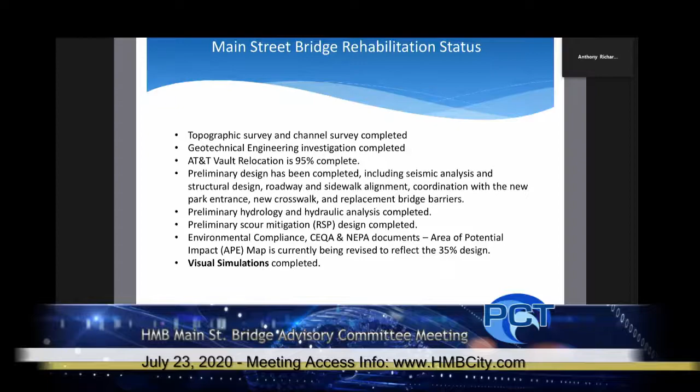We're going to phase the project and try to open up traffic as soon as possible, but for most of that 1.5 years, we would have one lane of traffic. That's pretty disappointing to the downtown businesses.

Compared to the original option of closing the bridge down completely, this is the best scenario. Closing it down completely would have been unthinkable and caused rioting over the one-way streets.

Are you going to provide other ways to get downtown besides the bridge? The traffic flow coming to downtown from Highway 92, heading south, would be open at all times. Going back to Highway 92, you would have to go down Kelly and Highway 1 and then back to 92.

Would we have additional signage for people to know where to come and go? Absolutely. We've already looked at the traffic circulation and are proposing some signage. We reviewed that this morning, and we'll make sure adequate signage is in place well in advance of the bridge closure, with communication through the web as well as flyers to the businesses.

Is this committee allowed to look over that signage before it's signed, sealed, and delivered? Absolutely, that's one of the things we'll bring to you. We could even schedule it for next time, since we've already looked at the signage and are taking the approach of more is better, so people understand exactly where to go. The signage will be available in about a month, and we could share that with you at the next meeting.

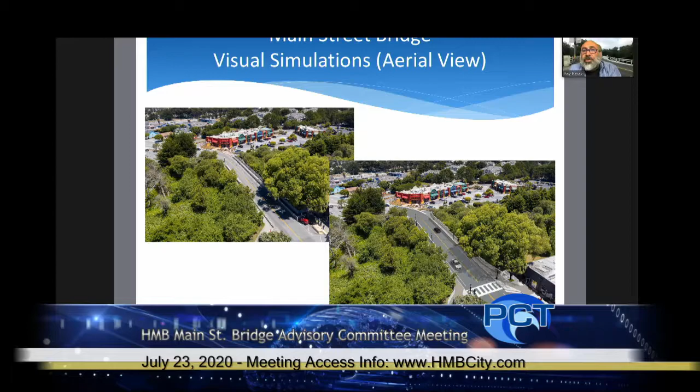So this is the aerial view. You're looking from the south to north towards the shopping center where the coffee company is, on the north side. You'll see a slight view of what the bridge is going to look like, and the south side, where we've added a crossing and conforming sidewalks coming on both directions.

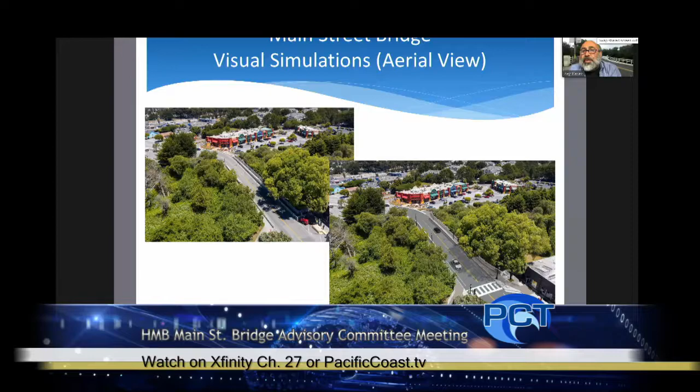Let me move to the next one. This is the existing view on the left and the visual simulation on the right. Let me get my pen here. What you see on the left side is this barrier, which is going to come out and is no longer required. Instead, we have a new barrier with a crash cushion at the end. What you see on the sidewalk is also a MASH-approved FHWA barrier that's steel and painted white.

The barrier between the pedestrians and the vehicles is concrete, also painted white. As you can see, the bollards at the end of the barrier have been removed because FHWA no longer allows any vertical intrusions unless they're set back 16 inches from the barrier, so it was not acceptable to put the bollards at the end.

Instead, we have those crash cushions, as you can see here, with the orange markers to make sure nobody has a head-on collision with the barrier itself. The sidewalks are concrete stamped to look like the existing wood color of the current sidewalk.

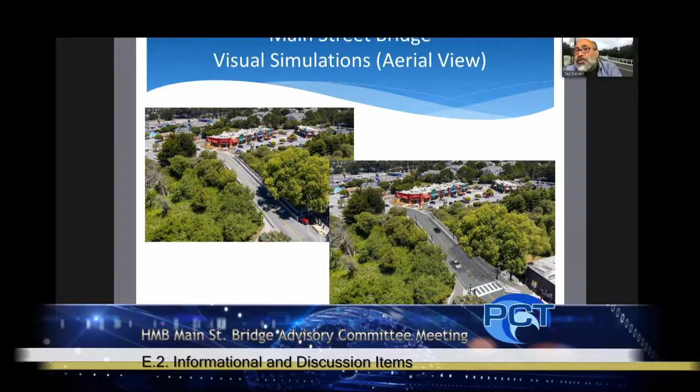Let me go back. Pardon me, Ray. On the crosswalk, John had mentioned a few meetings ago that the old Pasta Moon, whoever owns that property now, there was going to be one parking space taken, and there had to be a move to do that. Has that been done?

The parking space, we will be using that parking space to widen that area and create the crosswalk, correct. Currently we have posted signs that it's no parking except for loading and unloading. But eventually one of the parking spots will come out and be included as part of the sidewalk and crosswalk here. This one is looking to the north and you can see where the crosswalk is.

And Pasta Moon, it's the old Pasta Moon. Now it has a new name, I believe. I just looked at their menu recently and it's another Italian restaurant. I just can't recall the name, but they'll be opening up soon.

About the north end? Yes, we have a pretty significant curve there, and I think currently you might be able to see it in that image. There's those bumps in the middle there to kind of let you feel if you're veering off into the other lane. Are those going to be on that tight curve for the new bridge as well?

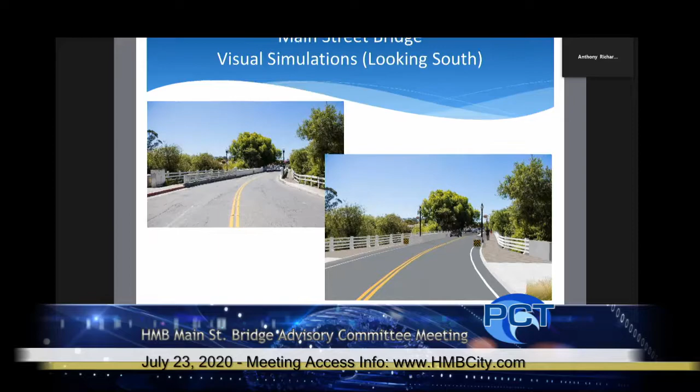Doug Garrison is our planning contact, so Doug, would you be able to respond? Sure, Rick. Well, like most everything, it will require a coastal development permit, so you'll be seeing that along with all the environmental review, just like on most major projects that go through the Planning Commission.

This one's a bit more complicated just because of the number of different agencies and departments within Caltrans involved. It's been a bit of a moving target trying to meet the engineering safety standards, the historical resource standards, and just get the project pinned down enough where we can have a stable project description and get the ball rolling on the other components of permitting.

Okay, great. I don't see anything I would find objectionable from an architectural review perspective. I can't speak for the other 4 members of the Planning Commission, but it'd be great to get something in front of the Planning Commission in the near term, so we don't have to worry about rewriting things after we've gone through a long and extensive engineering process.

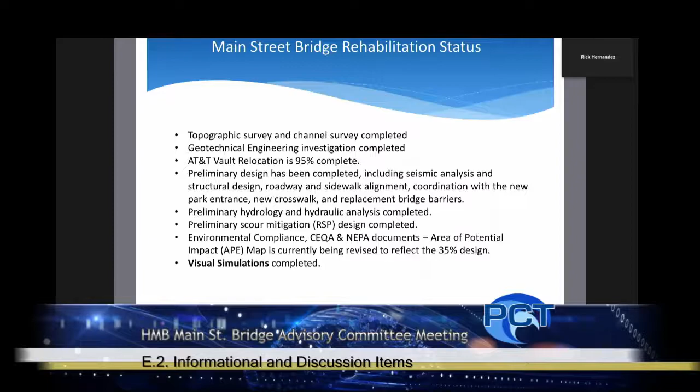The only question I do have is—I understand we have safety standards, we have engineers who've looked at things. Like Jerry and others in this process, we've all seen things that Caltrans and city engineers have put in place from a pedestrian safety perspective that aren't always tip top. So my question is more about pedestrian safety and cars running over the sidewalk. What are we doing to make sure pedestrians are safe after Pumpkin Festival, when some of the rowdies are leaving town having had a little too much to drink? How do we handle those situations to protect our pedestrians?

I'll jump into this in the very basic sense. The new standards we're challenged with, in terms of the historic nature of this, are all designed around protecting pedestrians and ultimately protecting the motorist as well. Ultimately, this is a slow speed bridge and needs to continue to be a 25 mile per hour area, which is what's led us to some of our challenges with design standards that are looking at 45 mile per hour straight-on hits by an SUV.

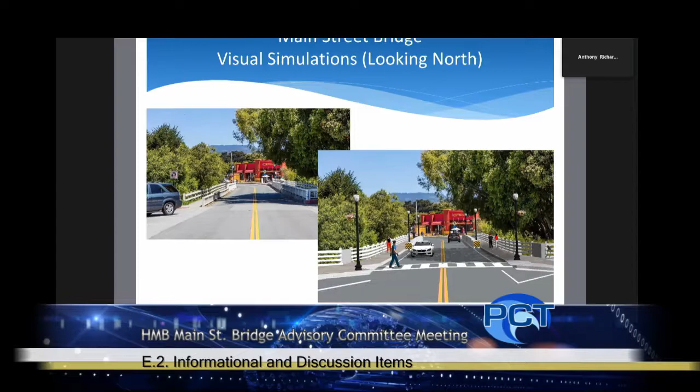One thing that may not be totally apparent is the proposed concrete barriers are in exactly the same location as the existing ones. So as you're driving over the actual bridge portion, it's a narrow lane, but as soon as you get past the barrier, the roadway actually widens out by about 18 to 20 inches on each side. Right now that steel railing is in line with the concrete barrier, so we've actually pushed the sidewalk out a couple of feet. That's going to help from a pedestrian safety standpoint—pedestrians are pushed back away from the traffic lane. There is still a white line, so that's going to help with traffic calming and keeping traffic offset from that curb line.

I feel a little worried about that crosswalk, specifically for the huge amount of delivery trucks we have coming through that area. So I think it's great—I didn't realize there was a hump there already—but I just want to put that in everyone's brain to think not so much about cars and SUVs and pickup trucks, but the big semis coming with equipment on the back end of them as well.

Yeah, I agree with you, Jennifer. I think for the next meeting, besides bringing you a detour plan, we'll bring you a focus plan on this crosswalk and how we plan to improve it to make it safer. Anthony and I will go back to the drawing board and come up with a new plan, and we'll bring it to you next time.

Yeah, share with us the safety aspect, the calming of the traffic, everything Jennifer said. I would put that into the next agenda, because there's a risk there between bicycle, pedestrian, and heavy traffic—this is the only place where everything converges. So it'd be good to see you next time, Ray.

So what we'll do is add the sharrows, we'll work on this crosswalk, go to our toolbox for traffic safety on pedestrian crossings, and see whatever we can do to make this safer. We will add that in and bring you a larger version of this focused area, both as a simulation and as a plan to look at.

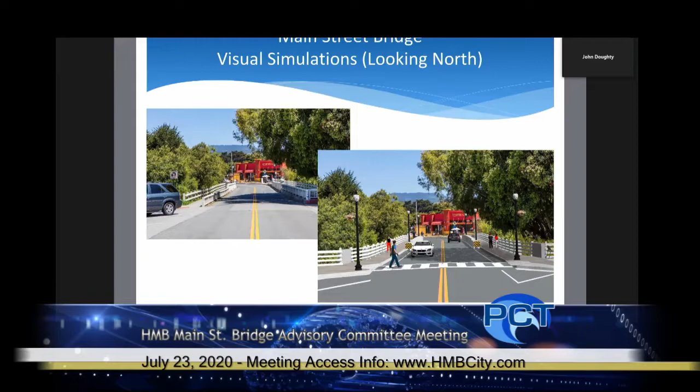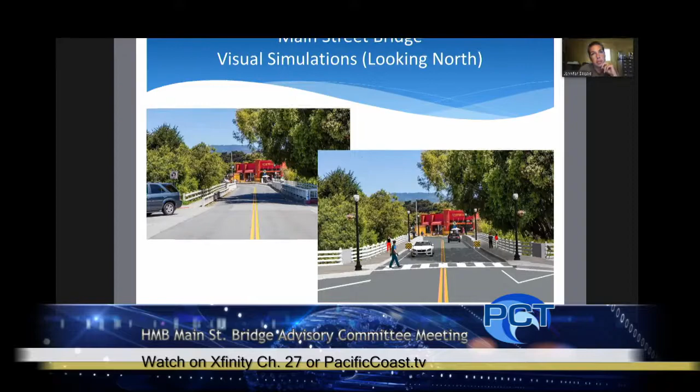But I guess, being the pessimist on this, I think what we see is a lot of those trucks going down the middle of the street, so the Botts' dots won't be a factor because they'll just straddle them. But that's just my pessimistic nature coming out. And the sound can be loud if a noisy semi goes over it. So I think these were great comments.

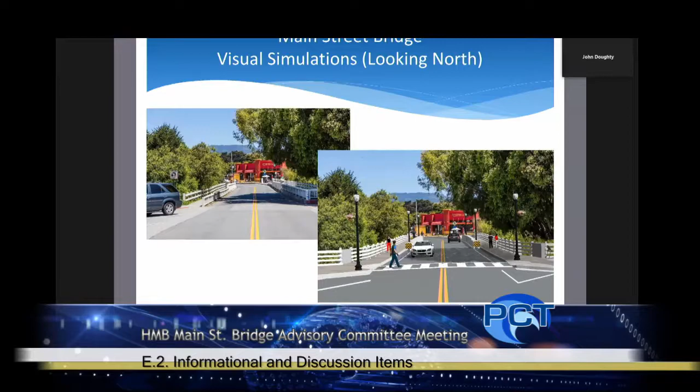That's why we're here, that's why we're talking to you. Our guys are focused on a lot of the structural and dealing with that, and we're trying to do this whole deal. You get sometimes a little myopic in the look, so thank you for being the eyes and ears to recognize these things. It's really important.

Those are good comments. The last simulation we looked at was looking east from the west side of the structure, just showing that the arch still looks the same, just cleaned up concrete.

The sidewalks are not attached to the bridge, even though they're adjacent to it, so there's no load on the bridge. The old sidewalks were attached using triangular trusses, and those will be coming out. Instead, we would have clean concrete underneath.

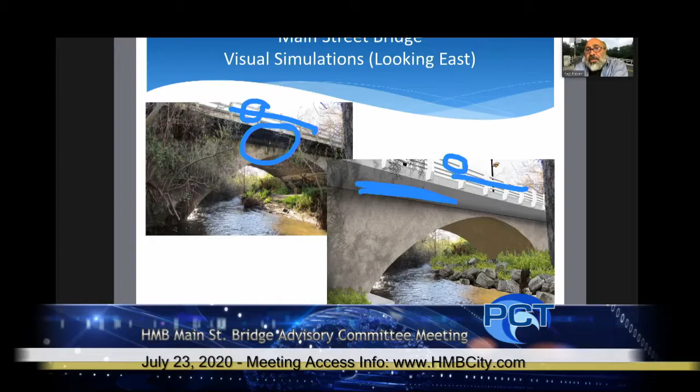The railing would be pretty much the same look, except it would be steel and painted white, at 42 inches. We made a change with FHWA and extended the top of the railing supports to match the top of the existing railings, so it stands up a few inches to match the existing historic look of the bridge. That's pretty much where we stand in terms of trying to appease the architectural historians and make sure the historic integrity of the bridge stays the same.

So what we wanted to ask tonight is, if you're happy with us keeping what we have designed in line with the historic integrity of the bridge, we'll move forward with a motion from you to take this to Caltrans and get their buy-off for the environmental clearance. All the comments on the detour plan and crosswalk, we'll bring back at the next meeting with a status update. But at this point we want to make sure you're okay with the general look of the bridge and creating this design that complies with the historic concept, and we move forward with this.

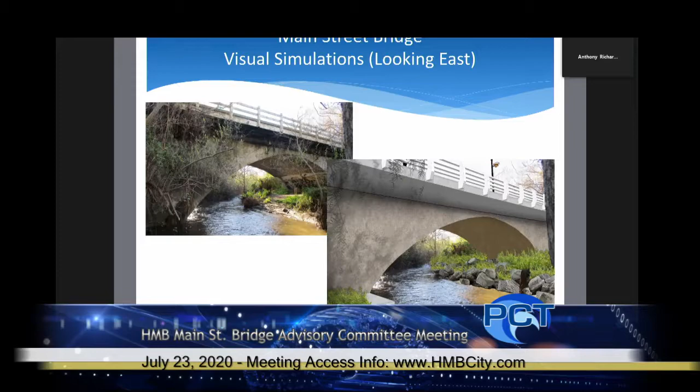Okay, yep, that totally makes sense to do some more channel restoration, not just at this one location, but further up and downstream. The intention here, by the way, is that we would put in the scour protection below the existing level of the creek, so we wouldn't be changing any flooding potential. Those are things that have to be looked at as part of the hydraulic analysis.

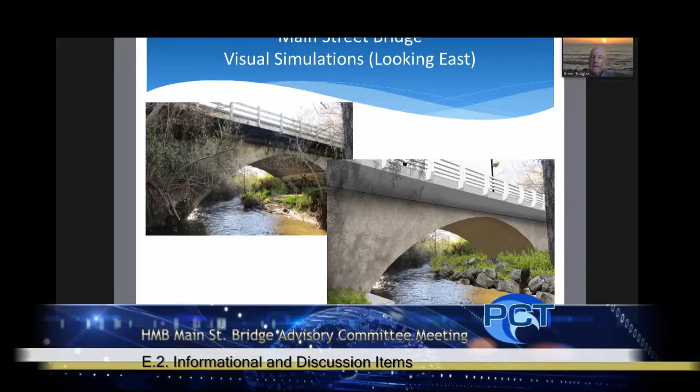Ray, did you ask a little earlier for us to approve a tentative design for you to take to Caltrans? Yes, Brian, thank you for bringing that up. I just wanted to get a motion from you that based on the visual simulations and the overall concept of the design, this would be the direction we'd go in order to maintain the historic integrity of the bridge, and we could present this to Caltrans and FHWA for their buy-in.

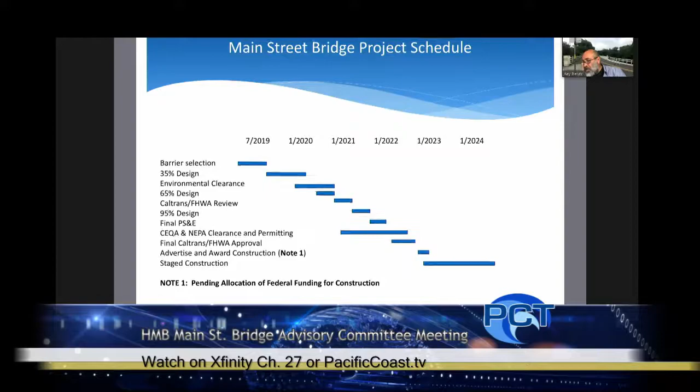At the next meeting, we will bring in the new design for the crosswalk. We would also make some changes to the layout, adding sharrows for bicycles and bulb-outs. We would rearrange the sidewalk to make it safer, and bring it back to you along with the detour plan and traffic control plan for what we'll do during stage construction, including how we'll direct traffic back to Highway 1 and 92.

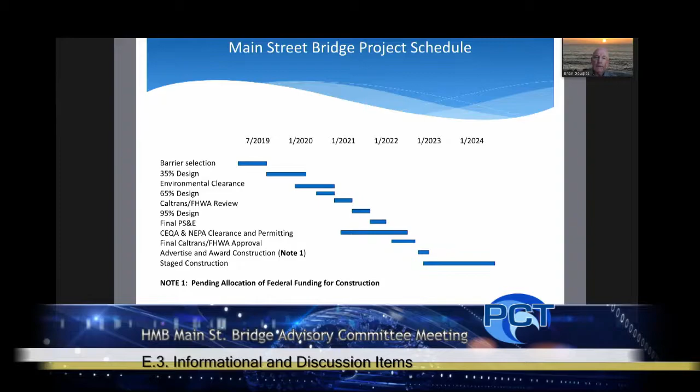Speaking of budgets, Ray, I do have a question. Of course we have control to some extent of our Half Moon Bay budget. Is there any jeopardy with all that's happened with our pandemic that either the federal, state, or county budgets would be impacted?

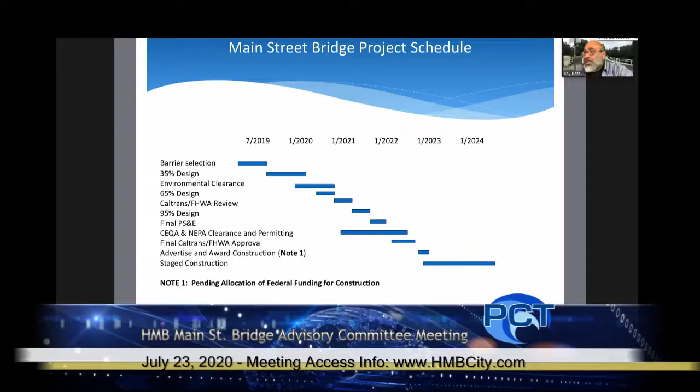The budget for this project comes from the Highway Bridge Program. We already have the E76, as it's called, from Caltrans allocating $1.2 million for the design. They call this the design or preliminary design phase and environmental clearance. That budget is in place and in the books. I don't see any problems, anyone touching that budget since it's already been allocated and we already awarded the contracts, so I think we're okay there.

The next phase, about $6.5 million that we need from them for construction plus the city contribution, is something we need to work on once we see that all the approvals are coming through. We'll work with Caltrans local assistance, MTC, and see if the federal budget is still going to come through. We're hoping it will — there's no reason it shouldn't. Infrastructure is the first priority, and even with the pandemic that has remained a priority. I don't expect that to go away.

The only other issue would be the city contribution. The city contributes about 11% of the total budget, and for construction that's approximately $800-some thousand that the city needs to contribute. That would be the only other contribution needed besides the federal contribution of roughly almost $7 million.